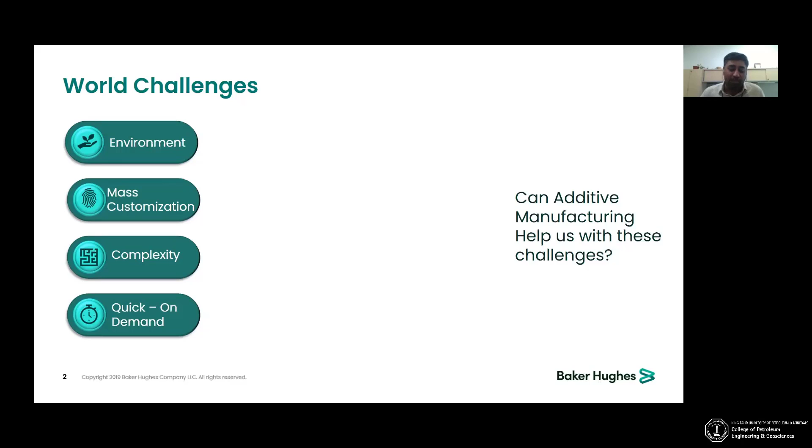Then there's the need for mass customization. There's also the idea that we need more complexity because some of our problems are complex, and then quick and on-demand is what we need, from movies to content online. Everything is becoming on-demand now. I don't remember the last time I actually watched a TV show when it was actually happening live. It's always after, when it's done, and in our own leisure time.

So that's one analogy I'd like to draw. Now, environment - what is the challenge today? First, talking about manufacturing: the process of manufacturing itself is quite inefficient. Whichever process we talk about, it's energy consuming, there's a lot of wastage. So there are inefficiencies that can be tackled.

The second one is transportation. Right now manufacturing happens in kind of manufacturing hubs, so parts are produced or equipment is manufactured in certain parts of the world or in certain places, and then it gets shipped around or put on an airplane and taken to another part of the world where it will actually be deployed.

And that obviously leads to long supply chains. Now we have learned a lot about how those long supply chains can be hurt in a situation like COVID, where there are travel restrictions and risks involved in moving people and equipment from one place to another. So we already see the kind of impact these long supply chains face.

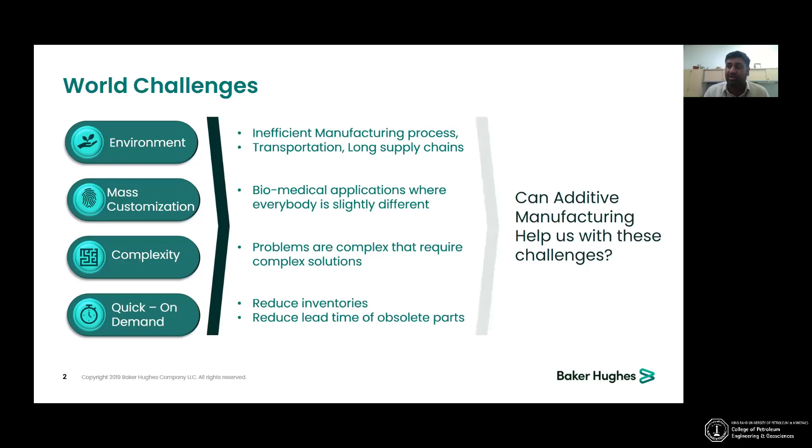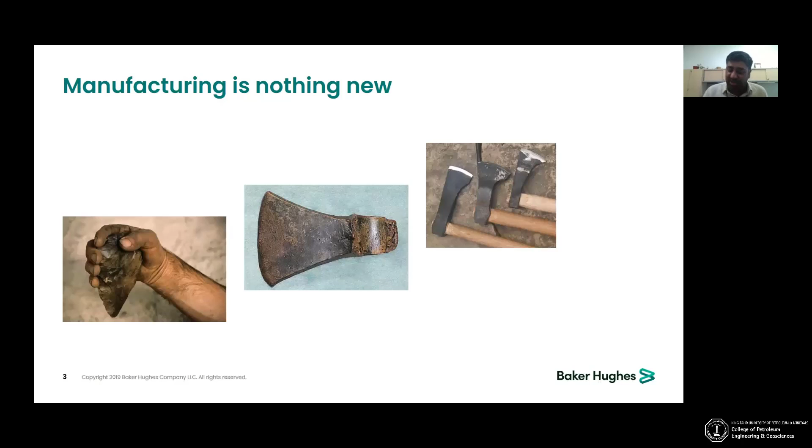Manufacturing is nothing new. We started making things from the Stone Age, so there's nothing new there. Went through the Bronze Age and then the Iron Age. What is different now? Why is additive manufacturing different from whatever we have done before?

Well, the big difference is we are completely changing the way we used to make things. Before, let's say this piece of rock that I have here, it started off as a slightly bigger piece, or maybe close to this shape. Then the rest of the material around it was chiseled away or somehow broken away, and we were left with a tool. Nothing much has changed over the last, let's say, few million years in this arena. So either we learn to melt this material, melt these metals, and put them in a mold to create, or manage to push them through a certain mold to get them into a shape.

Now that is all what we call subtractive manufacturing. You subtract the material away. Additive is the exact opposite of that. In additive, we add material, that's the word additive, where we need it to be to come up with a shape at the end. So most of the time we start off with either a powder or some kind of melted material that gets deposited in certain locations and then either cured, or if it's melted, it just solidifies. So that's the difference between additive and the rest of other manufacturing techniques.

But why does it matter? What's the big advantage of it? So here I have some definitions, more for academic reasons that I've put them there. But I've already explained how additive actually works. It's just adding material together, layer by layer. This is usually how the process is defined by a few international bodies like Wohlers Associates or TWI. So this is for academic reasons, but I hope you got the concept of how additive actually works. It starts off with a CAD model, so you have a digital file, then you're converting it into a solid part layer by layer. That's essentially the process.

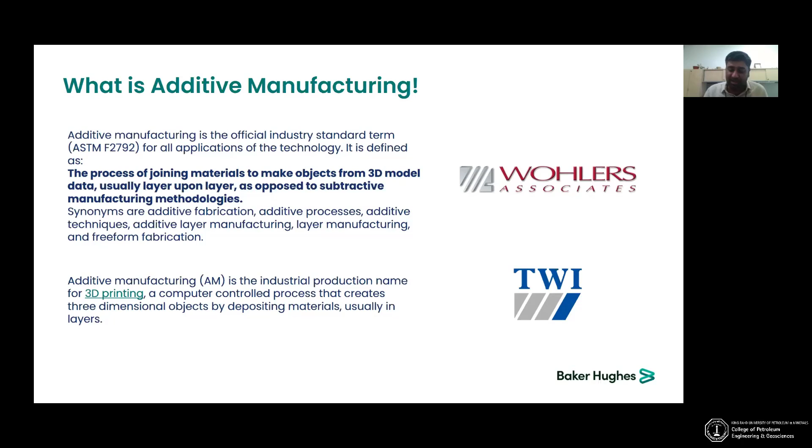And these definitions are very similar, they almost say the same thing that I've just mentioned. There are various modalities, I've listed 7 of them here, and they're all called additive manufacturing. So it's not one thing, it's generally whatever fits in that definition could be considered as additive. Powder bed fusion, and I've listed down some of the materials that can be used in these modalities to make parts. So powder bed fusion is quite versatile, you can go from polymers, composites, metals, and ceramics. Direct energy deposition at the moment is mainly metals.

Stereolithography is polymers, composites, and ceramics, so metals are not there yet. Material extrusion is polymers and metals. Binder jetting is versatile, so it pretty much covers all 4 different types of materials. Materials jetting is polymers, metals, and composites, so ceramics are a bit difficult there. And sheet lamination is again metals and polymers. So there's a lot of detail I can go into, but I'll focus more on powder bed fusion and direct energy deposition. The others are also similar in nature.

So just for the purpose of explaining, powder bed fusion is where we start off with powder and deposit a layer of metal powder, which is then melted using a laser wherever we need the part to create that shape. So it's a layer by layer process. When one layer is completed, the platform moves down a little bit, and then the next layer of powder is deposited. Obviously, the thickness of the layers, the laser energy, and the particles are all important factors that need to be considered when setting up this process.

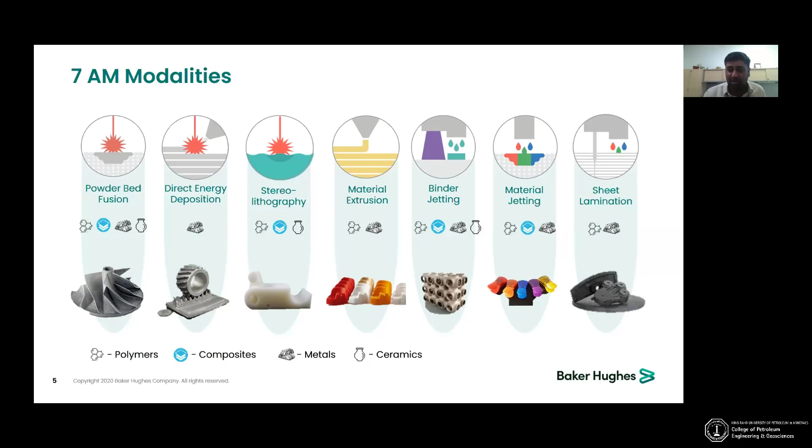Now let's start to look at some of the challenges. Environment was the first challenge I mentioned — it's an inefficient manufacturing process. Transportation and long supply chains were the issues. Additive has quite a high yield.

Tackling the first part, inefficient manufacturing process — most of the metal powder or material that we use ends up as part of the final piece. The yield is quite high, and whatever is remaining in that powder bed goes back into the store, and then we can reuse it again.

Secondly, since it's not very heavy — we don't need too many people to print a part — the process has the potential to be completely automated. So what we call lights off, doors shut manufacturing. If there's enough powder stored that can be fed into the machine, someone can remotely operate the machine, and there's no need for any supervision. It will just continue to operate and print the part.

To the point that — that future is not far away right now, but it could be possible that the printer actually takes orders directly and tries to schedule them and starts printing. It is actually possible, but again, I'll get to the challenges associated with additive right now, some of the limitations we yet have to overcome.

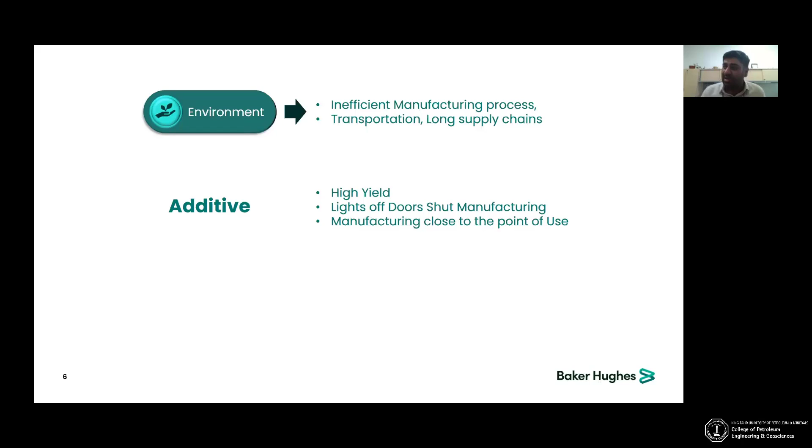So some of these challenges can be addressed by additive manufacturing. Now we will see how effective it is, where we are in this journey, where we can say yes it's done already - not 100% done yet, but at least the potential is there.

The next one is mass customization. Biomedical applications I mentioned before have mass customization potential - every part could be unique. And since we don't need a mold or anything, it's a CAD file, a digital file, we can modify it. We can make small changes and adjustments.

Customization is possible with pretty much all the technologies, but the main issue is cost. For example, if we are casting parts, you need to create a mold, and every time you have a slightly different shape, you can't just go back and create another mold - it takes too much time and money, makes it more expensive. Here, the cost of customization is almost nothing. We just need to modify the CAD file, and we get a part customized for that particular application - let's say for a particular patient, if we're talking about hip replacement. Every part can be unique.

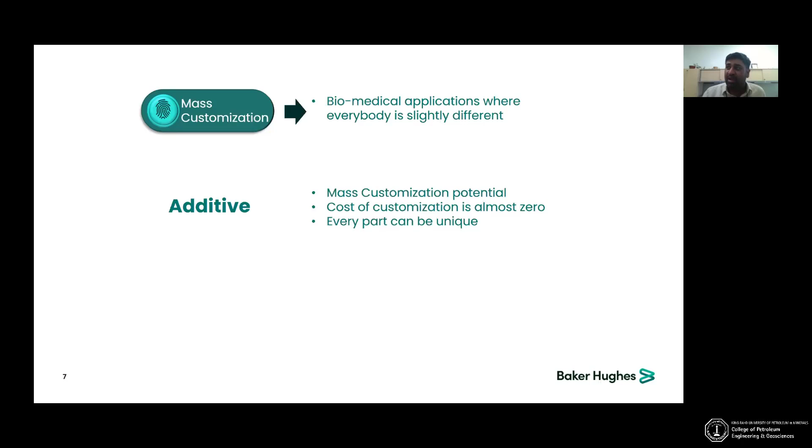And this is something which is already there - I don't think there's too much of a challenge here when it comes to additive manufacturing. The next one is complexity. As I mentioned, the problems are complex and require complex solutions. So if there's one thing I want you guys to remember, it's that complexity is free in additive manufacturing.

Let's say if I want to print a cylinder, 3 inches tall, simple cylinder. Or if I want to print a mesh, same height, 3 inches tall - the cost of the mesh is probably less than the simple cylinder, because it will take less material to print. But that doesn't mean the cylinder will be cheap in additive.

That mesh we probably wouldn't be able to produce even at 3 times the cost using traditional methods. So if I talk about the most expensive part we can print right now, it's probably a cube the size of the build volume - that's the most expensive part we can print. But as I said, complexity is free, meaning the simpler parts become more expensive and the complex parts become cheap in additive.

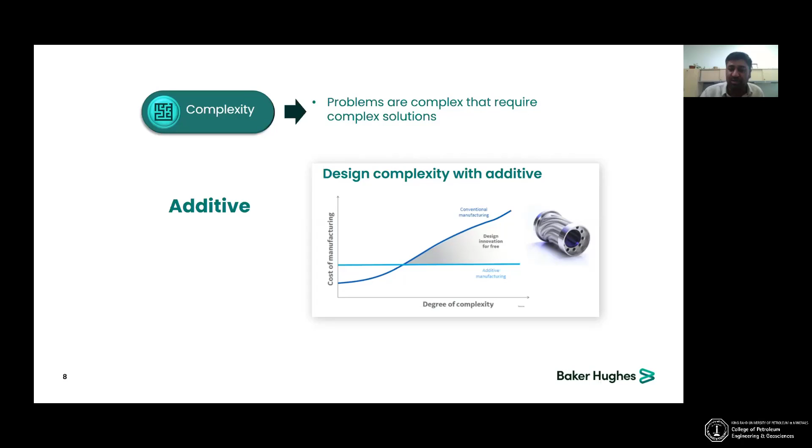So when we are selecting parts appropriate for additive manufacturing, we should look at how complex they are, because that will determine whether additive actually makes sense or not.

Quick and on demand - reduce inventories and reduce lead time. It's all digital, no molds required as I mentioned before, and it's quite a quick manufacturing process. And it's still getting quicker and quicker - now we can produce parts within a matter of hours, which is probably not possible any other way.

It's getting quicker and quicker. If I talk about the last 5 years, the manufacturing process has become around 12 times faster than it was 5 years ago. That has to do with people using, let's say with powder bed fusion, multiple lasers now - machine manufacturers are coming up with machines with up to 8 lasers, or even 12 lasers. And the layer thicknesses are getting bigger and bigger. So it's getting faster and faster.

The next thing is we can qualify parts in advance, keep them as a digital file rather than a physical part, and print when needed on demand. Again, the concept of digital inventory is not alien or far-fetched in the future anymore - it's being done right now.

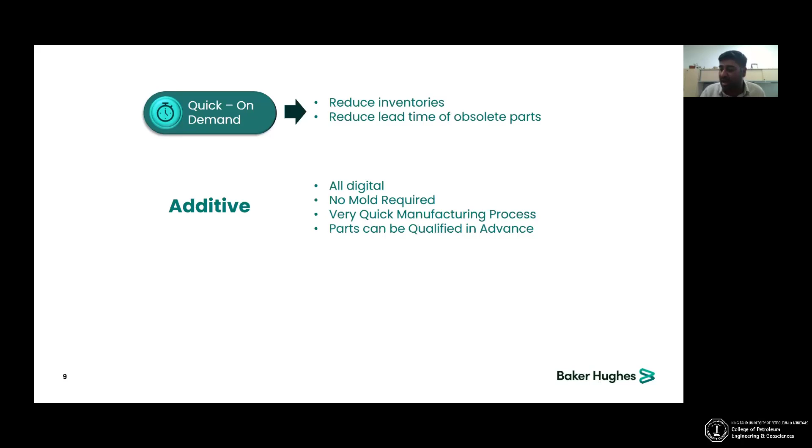Now, supply chain issues. So we talked about it before, and I have briefly touched on it. It's not that anything that we can print should be printed. As I said, pretty much anything, most of the complex geometries can be printed, but it doesn't mean it should be. It should be the right product, right quantity.

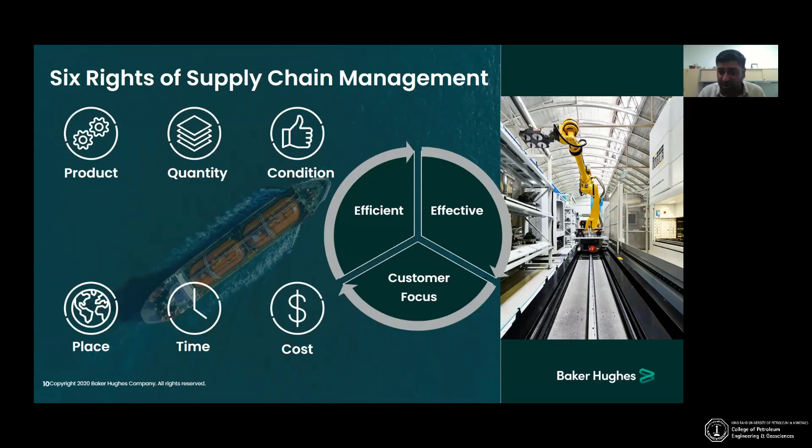Under right conditions, at the right place, at the right time, at the right cost. So it's not like we have a hammer. If I buy a hammer, I won't go fixing all my problems in the house using a hammer. It has its place. Same with additive manufacturing. It's not like we should apply it everywhere. It has its place. So there are question marks whenever there is a part that needs to be printed. Do we really want to print it? Does it actually make sense to do it?

We have already mentioned some benefits. So if I want to characterize them into 3 categories: relieve, improve, and grow. So emergencies, as I said, it's a quick process. You can reduce the cost, you can reduce the lead time. If it's difficult to manufacture, if it's a long time for a product to be developed, remember, it's a quick turnaround. We can print a part, quickly turn around, see if there's a problem with it, print it again. This iterative improvement process can be very, very quick. So we can reduce the time to market.

Improve: we can make parts more reliable. Because remember, we can make things complex. That means we can consolidate parts. If it was something made of 10 parts or 12 parts, no need to do it that way anymore. Make it as one. Even repairs, we can repair parts. Let's say something is broken, we can just rebuild it. Reduce the inventories, as I mentioned before, digital, and we can reduce the life cycle cost of the part. Maybe the part is more expensive on its own, but if you look at the whole life cycle, it becomes cheaper.

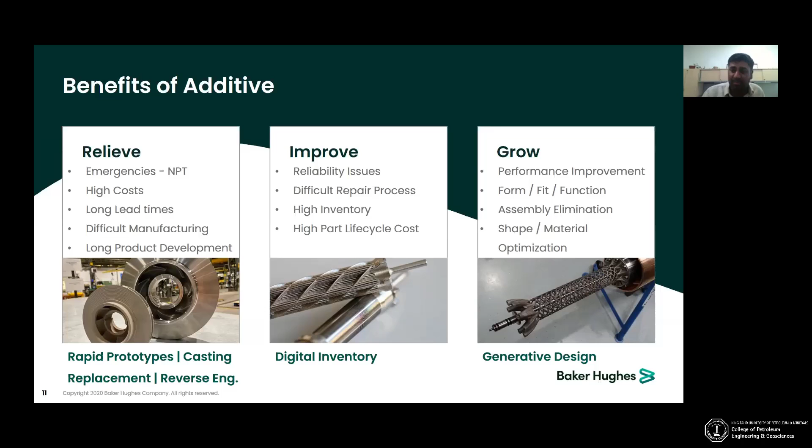Improve performance, form, fit, function. As I mentioned, we can print many parts, assemblies into one part. So we can eliminate the assemblies. And we can optimize even the material properties - we'll touch on those. There's a concept of generative design, digital inventory, which I've just briefly mentioned, but I'll get back to this in the next few slides. So just hang in there with me.

Department of Defense in the US is 3D printing autonomous drones. GE Aviation is a big benefiter. They are one of the most advanced right now in the aviation industry when it comes to additive, and they've printed some really complex, high demanding application parts. So now when people talk about how reliable additive is, I don't have to mention anything else other than that you have probably already flown an airplane that had critical parts made using additive. So you have unintentionally already trusted additive with your life. It's proven that these parts can be reliable, so there's no issue there. But obviously there's a process that needs to be followed.

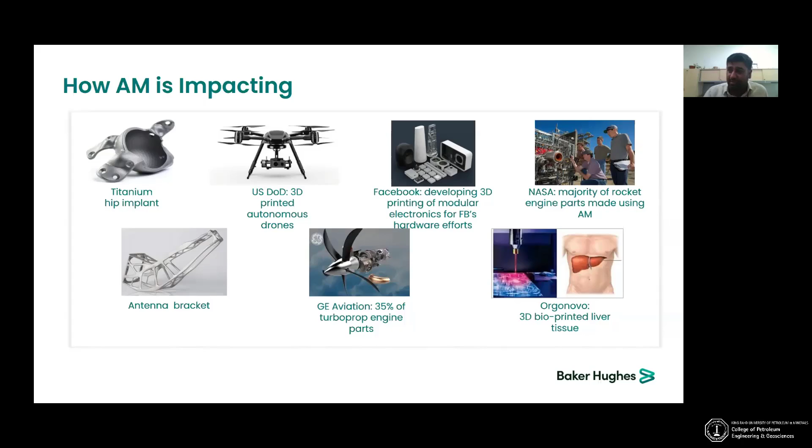Now let's talk about some of the problems we have. So I put a big rosy picture of what can be done, but now let's see how the process works and where are some of these limitations that need to be overcome. This is where you guys need to start working on some of these and help us, help the world.

It starts off with a demand signal. It could be a new product, some kind of reproduction of an old part, or some redesign. So you start off with that, then we get to the design or reverse engineer. The word reverse engineer is here, and we'll discuss briefly what that is and how it's challenging. Then it gets to printing. You have a CAD file now through design or reverse engineering, and we need to now make a part out of it. So that's the process of printing.

Rarely is the case that the part can simply be taken out of the printer and used, so there's post-processing required. Once it's completed, we go through qualification and acceptance to make sure it meets all the requirements.

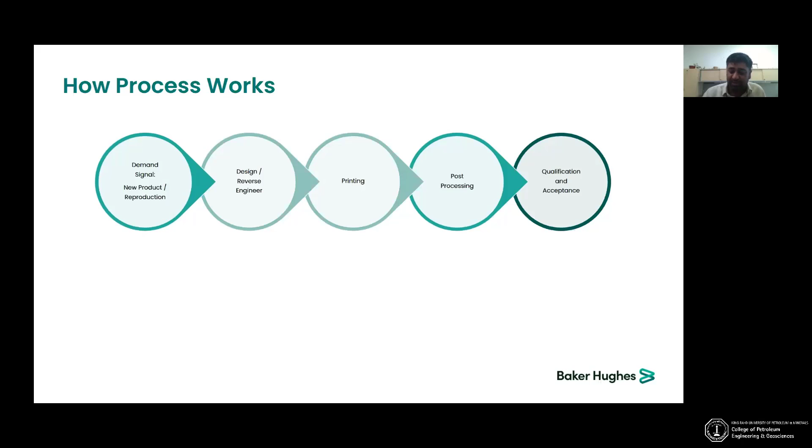Now, this is the promise: demand signal is predictive and automated. We don't want to be in a position where something fails and oh my God, now we need to fix it. It should be that we can predict a failure and then automate ordering, where demand signal automatically goes. This is where the idea of digital twins comes in. A part is about to fail, some sensor detects the problem, and then a demand signal automatically is sent to the printer nearby, and it prints the part.

That's the promise. Design should solve the problem first of all, and that's where additive has an advantage, because traditional manufacturing methods have limitations on what can be manufactured. So the designer's mindset is, whatever I'm designing, I need to be able to print it, I'm able to manufacture it. With additive, the design space has become bigger. It's not infinite, but it's considerably bigger than before. That means it's a little less of a worry for the designer on how this design will be created into a shape, and more about whether it will actually solve the problem I'm trying to solve.

Inconceivable products - meaning stuff that we can't imagine right now. Then it should be automated. Can we automate the designing process? The promise is that we can make some really complex shapes to solve a problem, and we can automate that process.

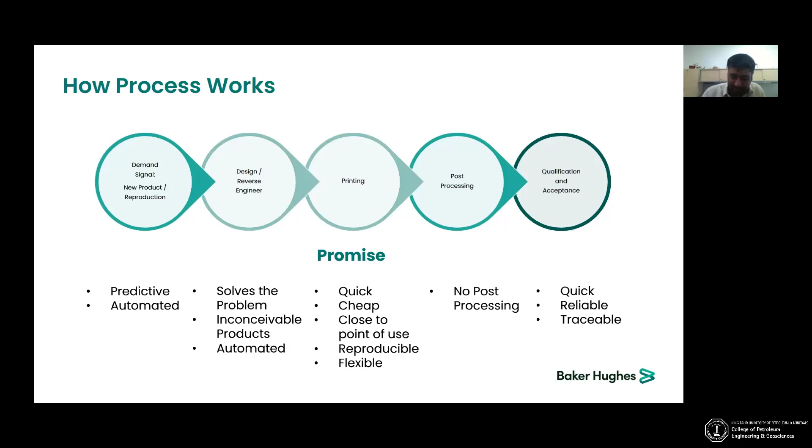Now, when we get to the solutions and where we are, my request is don't look at additive in isolation. It is part of the 4IR ecosystem, and there's only certain things that additive can do on its own. The rest of these 4IR technologies are what we call tech multipliers.

So additive on its own can do certain things, but imagine if we start to use computers to design parts - the idea of generative design - or we start to use AI and machine learning to predict failures. I mentioned before, automated predictive demand signal. And if we could start running simulations before we actually print, we make it more reliable and improve our success rate of how many parts we can print which are good enough in the first attempt.

So don't look at it in isolation. It's part of a much bigger ecosystem. Most of these technologies, in some shape or form, will come into this picture.

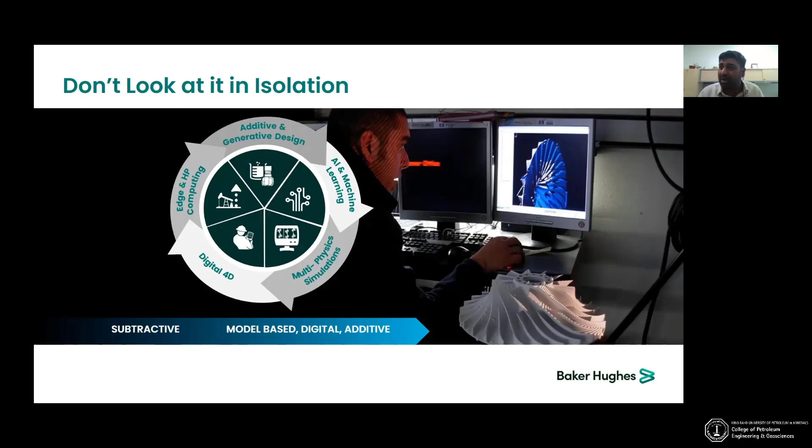Now, demand signal - the promise is predictive and automated. What is the state of affairs now? Right now it's reactive: action is only taken when issues arise or failures occur. So the idea of prediction is not there yet. It's not an additive limitation, but it's about things needing to be connected together - selection of the right tools for the right job. So generally there's lack of awareness and understanding about additive. As I mentioned before, it's a hammer, but we can't fix every problem with it.

Supply chain - so there's an inefficient ordering process. Right now, if there's a failure and we want to place an order for a part, it will take maybe weeks to get an order through, because there's a lengthy chain of approval processes built into the system. That system needs to be changed, because otherwise we can print a part in a few days, but if it takes us a month to get to that point, then that month is still wasted. So somehow we need to figure out how to go around that problem. And it's manual and slow. So obviously these issues need to be addressed before we get to this predictive and automated promise being delivered.

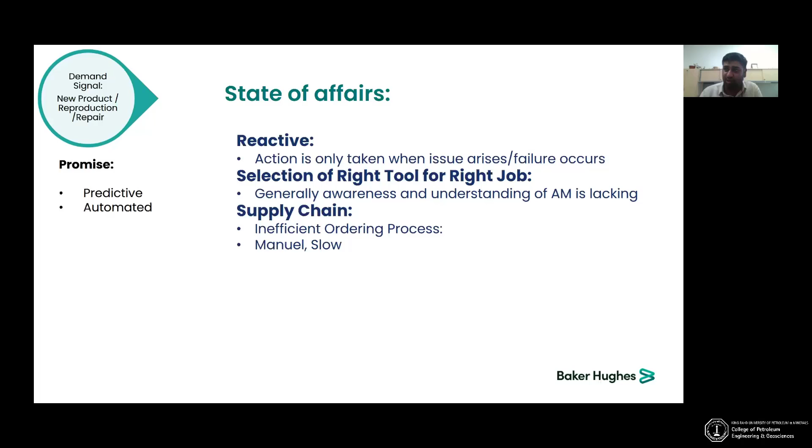Next one is design. I've put whatever is possible in green. So it solves a problem that's built in additive - that's the biggest advantage we have, that we can have really complex parts. That means the design space is bigger, enabling inconceivable products. Now, where is this coming from?

Designers' mindset needs to be changed. Right now, we have trained more designers within the last year or two for additive than for anything else, and that's because they're still thinking in a traditional manufacturing way. So that's a mindset change that needs to go through.

Customer mindset needs to be changed as well. They want to replace parts with the exact same material and design, but obviously that design was created because of the limitations that existed when the part was originally manufactured. Now we need to think how can we make it better. So there's that mindset - it's working, I want to keep it that way - but actually we can make it way better. So let us open up and think about it that way.

Then availability of tools. Traditional design tools work to some extent, but there's more simulation - additive process simulation - being developed. It's going very rapidly. People like ANSYS, NX and Autodesk are doing a phenomenal job of really pushing the limits, but still there's a lot more that needs to be done.

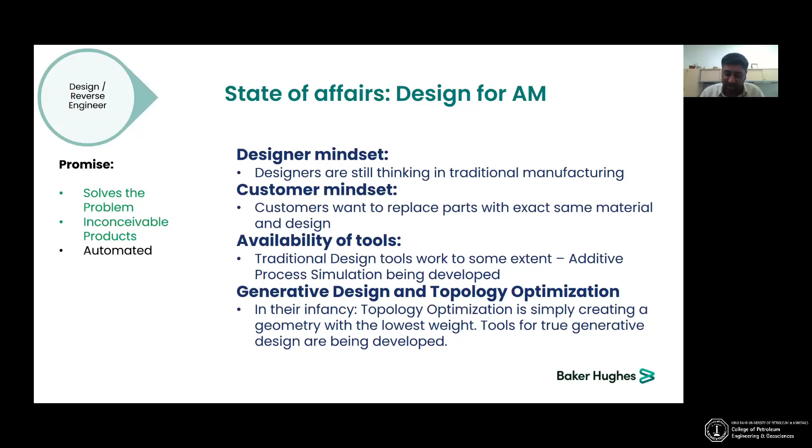Now, reverse engineering - that's a complex one. We can recreate two things: one is the recreation of the surface geometry, and the second is internal structures. For surface geometry, we now have various types of scanners available, and we can scan the parts and get a CAD file.

But internal structures are a bit more complicated. X-rays, CT scanners and ultrasound can only get to a certain depth into the material, so there's a limited capability there.

One big thing is IP issues. If anybody can get hold of a scanner and the right equipment, they can take anybody's part, scan it, and recreate it. Obviously, we have all the IP protections and patents, but it doesn't always work, because technology keeps getting better, and there are people out there who really don't care about IP - they want to get on with it - or in some cases there's no way to protect it. Especially in the defense industry, I don't think many people will care if there are foes - they would say, well, we will get it. Nothing stops it. That's where it becomes a risky business. We need to be careful.

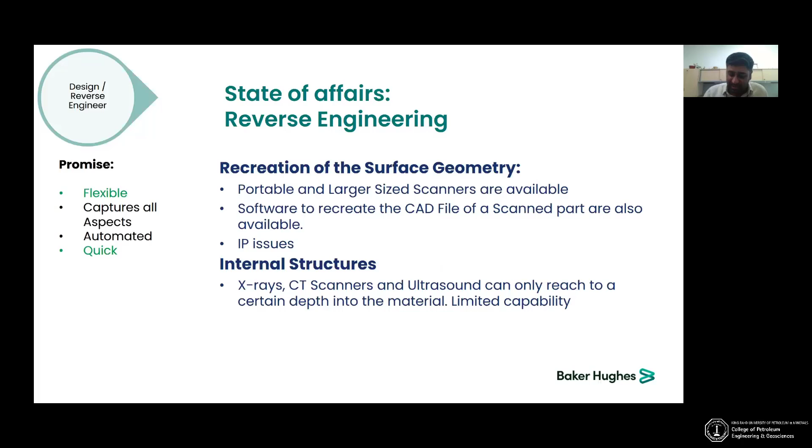Is it quick? Yes, it is quick. At the moment, go to TAP - these guys have a scanner, and it takes a few minutes to scan a part, so it is quick. But other issues remain: automation isn't there yet to some extent, and it doesn't capture all aspects yet. Internal structures are still a problem. There's work going on, but more still needs to be done.

Printing - now there's a long list here.

Limited choice of materials available for 3D printing at the moment. If I talk about materials and printers, the choice of materials is limited because we need a high quality powder, and it's relatively expensive to get.

Changing the material in the machines is getting better. I was in Germany last year at the Formnext conference, and I saw printers claiming you can change the material within, let's say, 30 minutes. Not proven yet, because cleaning methods that really make sure we have no particles left of the previous material are not there. So there's more work to be done on that.

Machines are qualified for specific materials, so reproducibility is still not 100% there. I can print a part on one machine, but if I change it to another manufacturer, I might still have to go through the qualification process, which is expensive and time-consuming.

I mentioned before, customers want to use the same material on the replacement parts. Usually when we get requests like these, the question is why? Oh, just because it's made that way before. Well, it was made that way because the material was cheap, and if you had made a part of another expensive material, the cost would have been high. Here, the cost of material is slightly expensive, but really the part of the cost that material has in the whole cost of the part is actually relatively small.

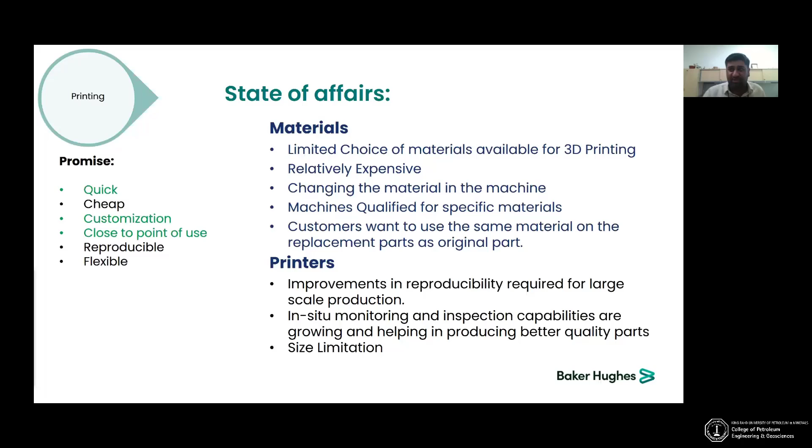Most of it has to do with either post-processing or mainly with how much time it takes for the printer to print it. So quick customization close to point of use is fine. Cheap is still not. Reproducibility still has issues. Flexibility - if I could print a part on any printer without going through a big process, then it would be quick.

Printers and reproducibility, as I mentioned before - there's a lot that needs to be done in situ process monitoring. There's a lot being done right now because printer manufacturers understand this. And the size limitation - how big a part can I print? There are different technologies that can go to different scales, but we still need to get much better at it. And we still need to be able to print a big part in a short time.

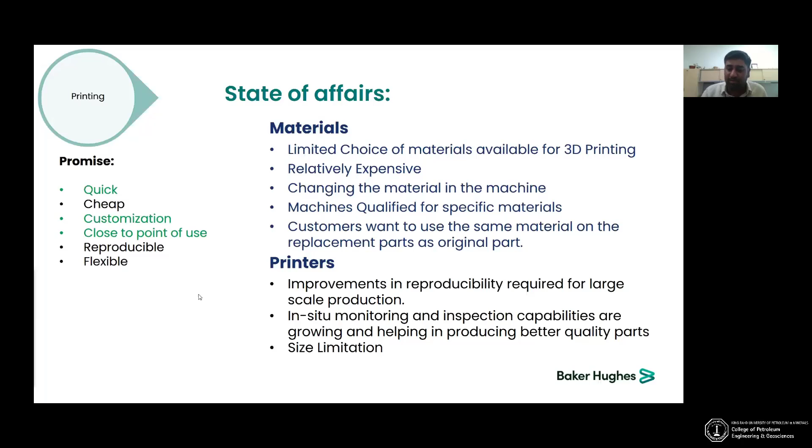So that limitation still needs to be overcome. It's being done, it's work in progress. So maybe with a few years we will get there.

Post-processing, we don't want any, as I mentioned before. So heat treatment, stress relieving, surface finishing is time consuming. You need a large footprint. So the idea that we can localize the manufacturing point close to the point of use, we need to get rid of this.

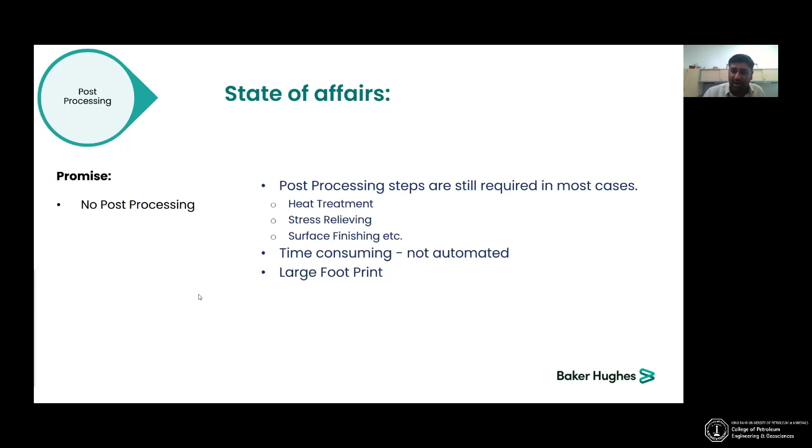So I'm glad we are working with KFUPM. We're starting work on some of these limitations with KFUPM - heat treatment is one, for example, and then a few others that I touched on before. But this is another challenge that we need to overcome. I think this will take a little while, and I don't think it will go away 100%, but I think we can do much better.

Qualification and acceptance - quick, reliable, traceable. At the moment, there are industry accepted standards that are being developed. Technology is growing much faster than the standards that need to be there. So there's this big debate now on how do we fix this, how do we go through this process quickly.

But obviously we need to be careful not to rush things, because the best way to kill any new technology is to rush it through and produce parts which are not good enough, and then just kill it there and then. The main difference though between previously accepted standards and additive is the melting methodology. That's the main difference, that's where the effort needs to be - how do we standardize this process, how do we make sure that we always get it the same way? Now that's where the problem is, and that's where more effort needs to be.

Monitoring - this is where additive is actually much better, because we can really look at the defects as they are forming during the process. So that's where it's probably even better than traditional manufacturing methods. Every layer, every micron on that layer can be and is being scanned for defects as we are printing. So this is where it's probably way ahead of other manufacturing methodologies.

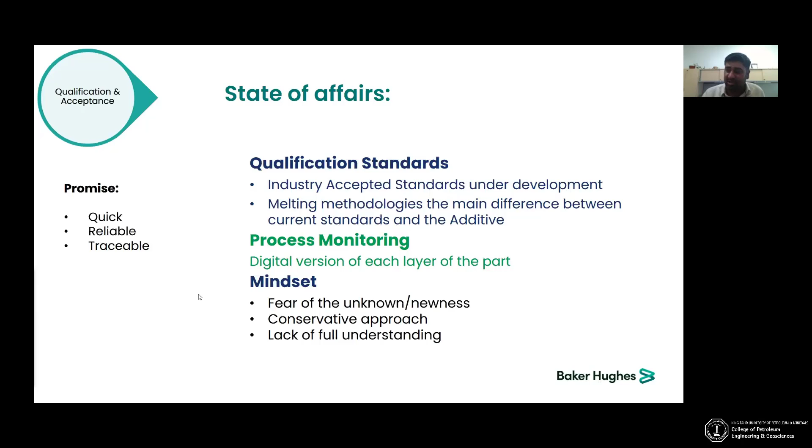Standards - I talked about standards before, but here I've listed a few. So from terminologies to design, material, methods, health and safety, quality - they're all being developed.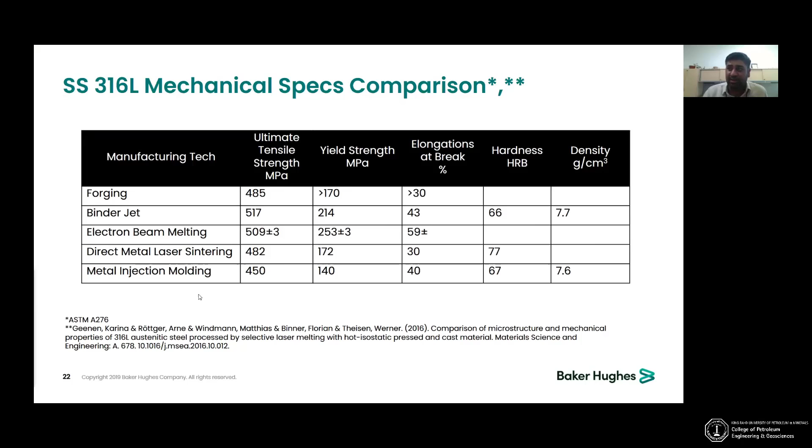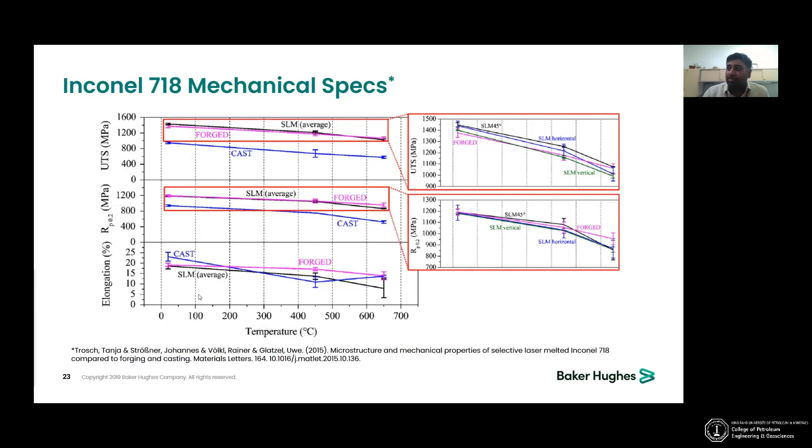So I've talked about stainless steel. Here is nickel 718, some of its properties compared against casting and forging. You can see it's not far off, in some cases even better. And this is Ti-64, so these are three key materials, that's why I put these three as examples. The Ti-64 has a lot of biomedical applications as well as aerospace applications. Inconel 718, or nickel 718, is highly corrosion resistant and has a lot of applications in various industries. And steel is of course the main material used everywhere. So these are three main materials, and in terms of properties they are not bad, they're comparable.

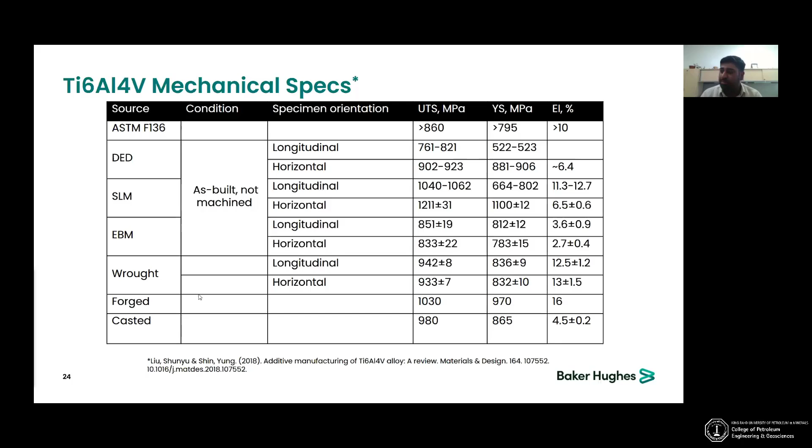So, missing links—this is a summary slide of what we talked about. Predictive and automated: there's failure prediction using AI that needs to be done. Design: we need generative design softwares, customer mindset, IP issues. Cheap, reproducible, and flexible printing: we need more robust printers. In-situ process monitoring needs to get better, make it easier to change the material, and offer a whole solution—meaning don't get us into the post-processing, and obviously we don't want any post-processing. And for the last one, more effort is required industry-wide. It can't be one company, it has to be an industry-wide effort, a global effort to develop more standards.

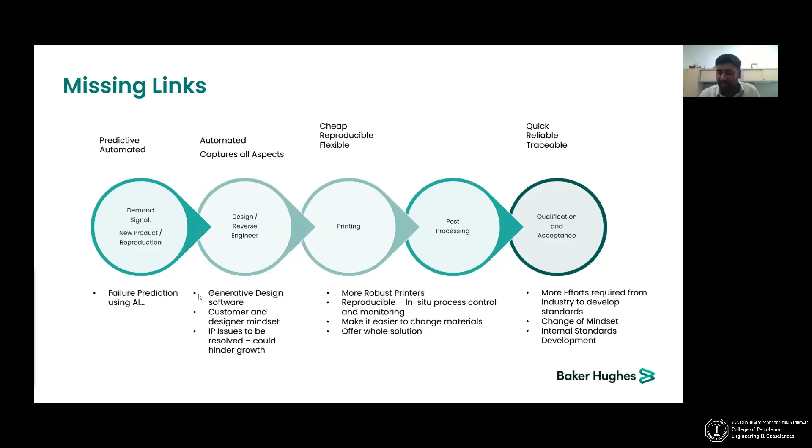Change of mindset, again, will come with time, but I think we can do more to change that, especially for the young graduates and the young guys like you who will join the industries. I think it's important that you're aware of this so you can make the most of it. Internal standards development is another way forward. Most companies, including us, have developed our own internal standards, and they are pretty good because we have produced close to 50,000 parts in the last few years with zero failures so far, because we have developed internal standards. But global effort is still required, and everybody needs to catch up to that.

That's how it should really be. Now the old days are gone where everybody works in their own little bubble. So from demand signal, everything else should work around that—from post-processing, printing, reverse engineering, and qualification, everybody needs to work together. We can't have these different teams now; it has to be one team where all this expertise sits. And this is how things are actually working—wherever we see additive manufacturing as a success story, the teams are multidisciplinary.

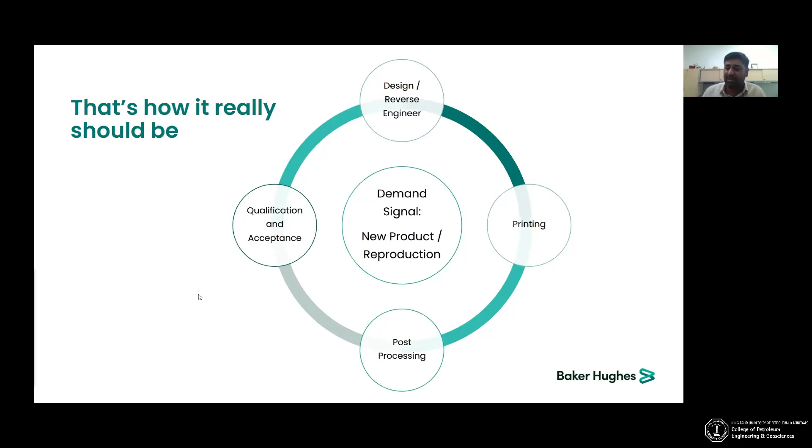Oil and gas industry—I'm talking to KFUPM, so there should be oil and gas in there, I'm not going to miss out on that. We are sitting in a country which supplies most of the hydrocarbons to the world. The oil and gas industry has challenges with a lot of old equipment, part failures, and long lead times with expensive consequences, because we have rigs far away. If one part fails, the cost of an hour is really high—we're talking about $100,000 in some cases. Large inventories, very long supply chains, as I mentioned before, going far into the empty quarter, sitting in one corner, and then another side somewhere in the middle of an ocean. And long-standing problems, either solutions don't exist or they are very inefficient. And we are notorious for having a very big carbon footprint.

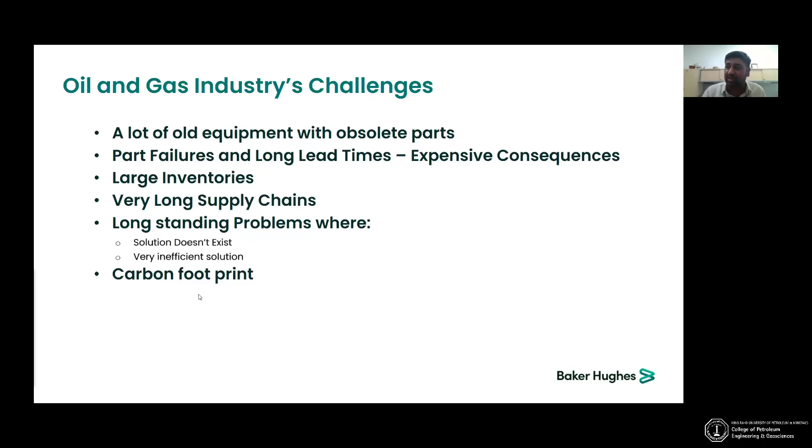Additive can solve quite a few of these. Here, additive service, inventory management—that's where we can solve some of those issues with large inventories. Then emergency service: scan, reverse engineer, 3D print—we can reduce the lead time. Point of use manufacturing solves the problem of long supply chains again, and reduces the carbon footprint big time. Engineering and generative design—this is where all those long-standing issues can be solved, which have been with us for a while. I just put it on one slide because I didn't want to be too general in my discussion, but specific to oil and gas, there is a lot of promise, and it is being adopted quite quickly globally.

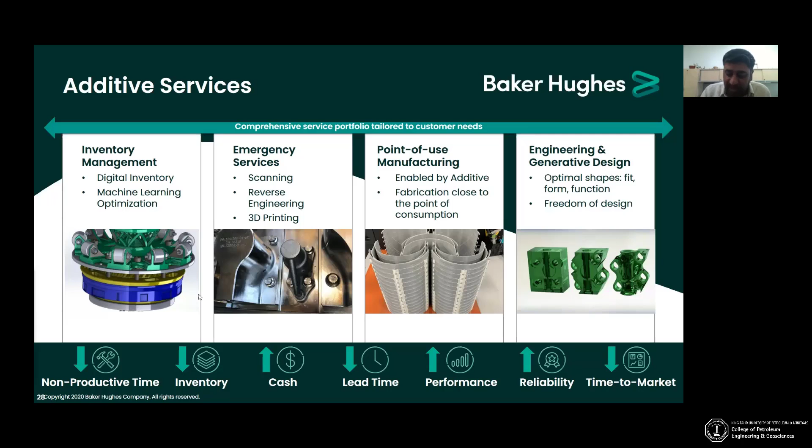So what I've just mentioned before: obsolete parts, quick manufacturing, inventories could be digital, point of use, complex parts can be manufactured, and we reduce the carbon footprint by reducing the supply chain. There are some challenges that need to be resolved, but overall for the oil and gas industry, there's a lot that we can do today.

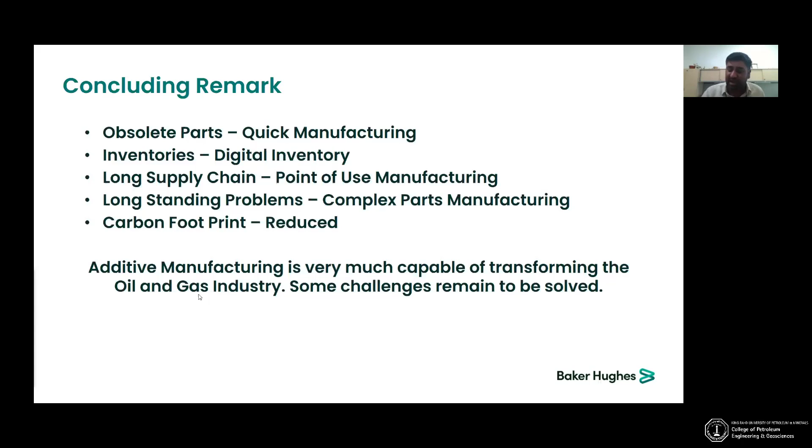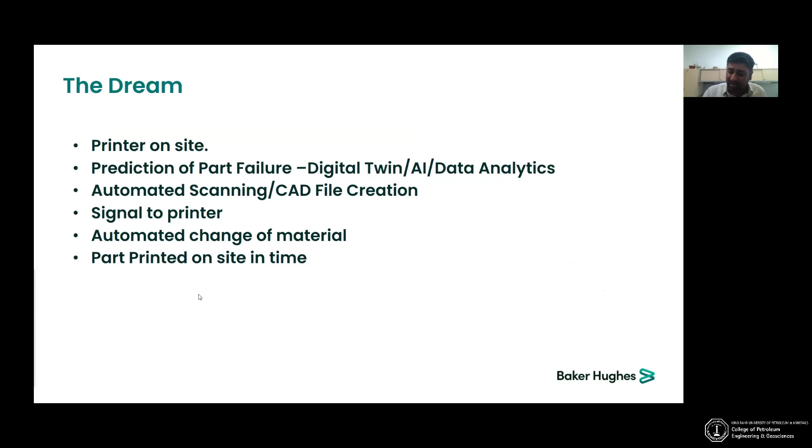The dream: we have a printer on site, prediction of the part failure, automated scanning, signal to the printer, print the part, and deliver on time. No lag times, all of those issues resolved. That's the dream, but we have already discussed what needs to be done to make this dream come true.

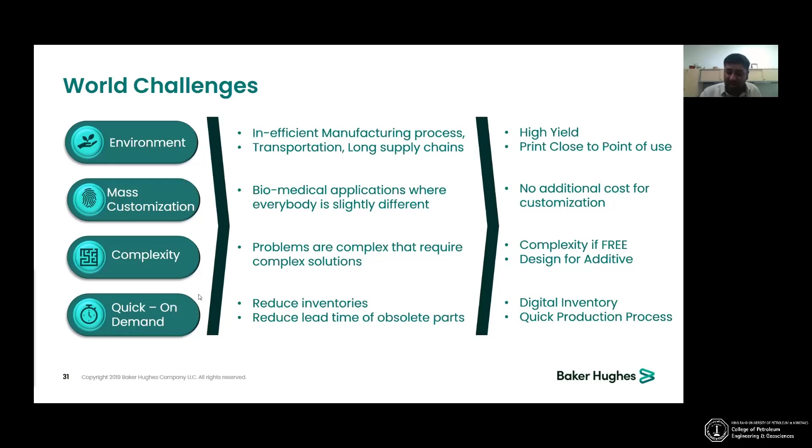Yes, actually I already received questions through the chat window from one of our students. If you would be so kind, his mic is not working, if I can ask you on his behalf. So one question, it's from Muhammad Malik, and he's asking: what is the minimum maximum size limit for 3D printing?

Good question. So it depends on which technology, which modality we are talking about. I can give you information about, let's say as an example, powder bed fusion technology. Right now, the biggest printer we have is 800 millimeters by 800 millimeters by 800 millimeters, so 800 millimeter cube, which is 0.8 meter in all directions. That's what was unveiled, I think, a couple of days back.

Thank you. The second question that came up: he's asking with respect to proppants, and the question is, is there currently material like proppants, it's usually sand, some quartz, or maybe some ceramics - is this possible? Would it be possible to print this?